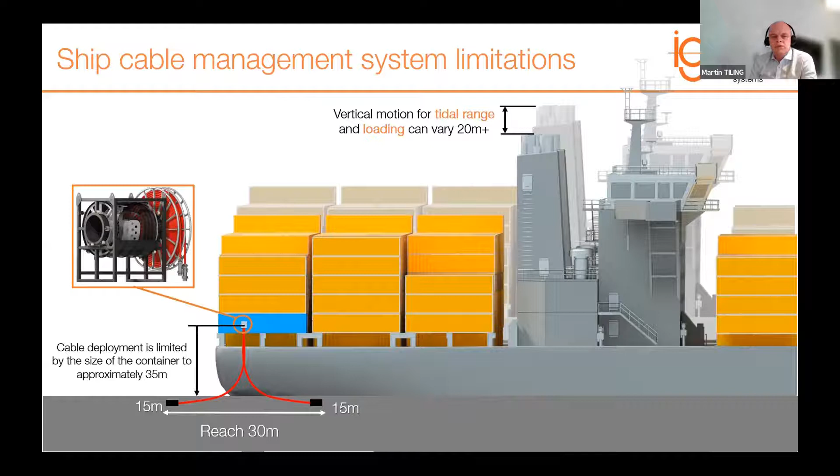What kind of problems are we facing? The main issue is that the cable management system placed on board a container ship has a limited deployment length. In the end, it depends on the site location, on the design of the wharf, and also on the tidal range, because that can be very different, from Hamburg to Kiel, for example, or from Vancouver to Marseille. You can have a big tidal range, and this can sum up to more than 20 meters of vessel movement that needs to be compensated. And then you have limited reach for the plugs to plug them in at any place.

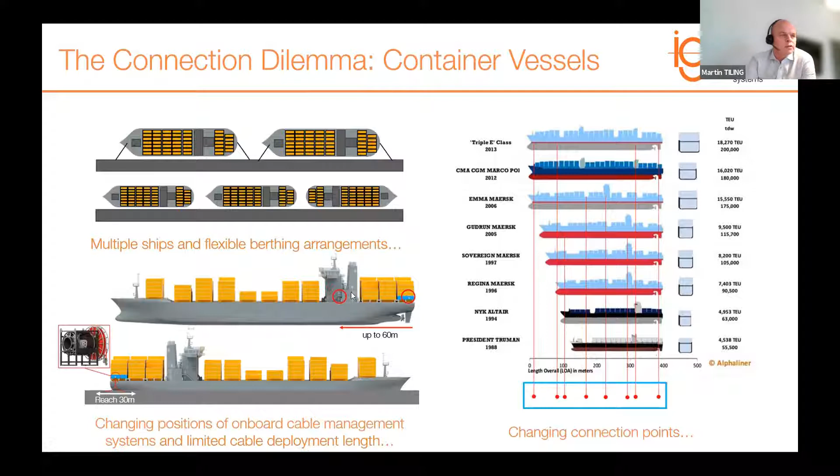That leads to the main problem of all shore power connections, not only for container vessels, but we see this also on cruise vessels. We have different solutions to address that, but the connection dilemma is really a key issue for all ports designing a shore power system. Every day you have different calling vessels in terms of size, berthing starboard, berthing port side, and the location of the cable management system on board can be at various points as well. So in the end, you don't know where to connect the vessel. Not today, not tomorrow, and foreseeing the future with new vessels or new lines calling this berth, it gets even more complicated.

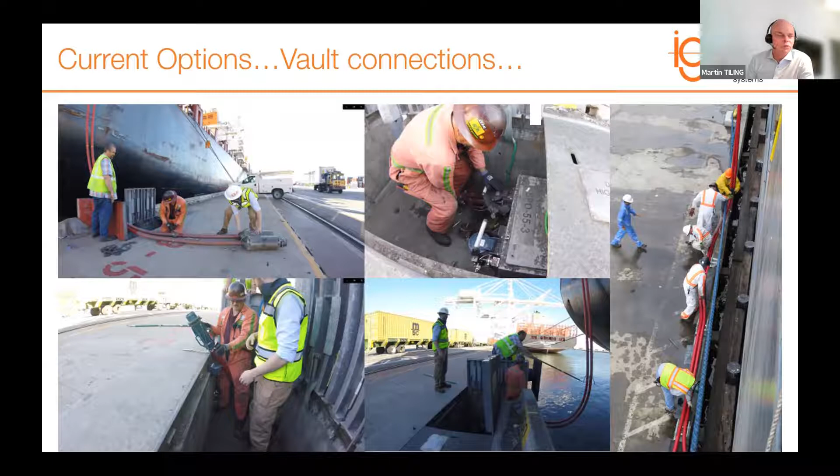If you think about the coverage you can achieve by placing an outlet every 50 meters, it not only costs a lot of money, but in terms of operation you create sort of red zones where you cannot connect. So in the end, you have to move the vessel or you cannot connect.

And even getting close to it, these cables are super heavy. They weigh 10 kilos per meter. These are 2 cables. It's not easy to move them. You can do this coming from the vessel about 3 to 4 meters. That's fine, you get this done. But afterwards, you definitely need help. You need to call your colleagues.

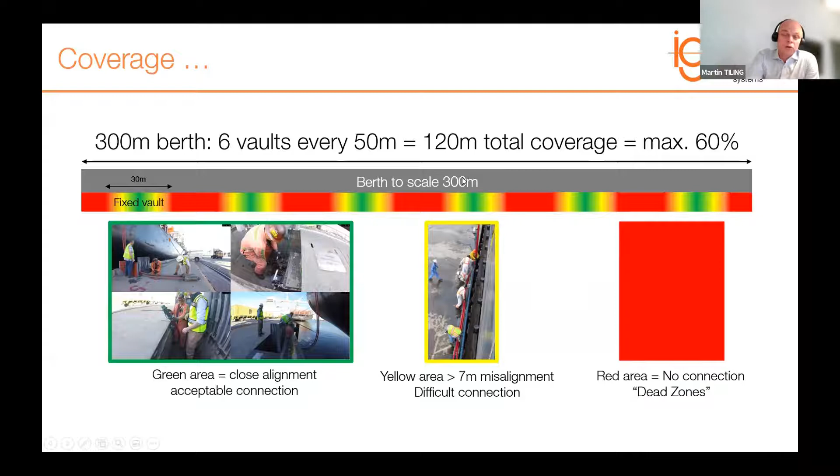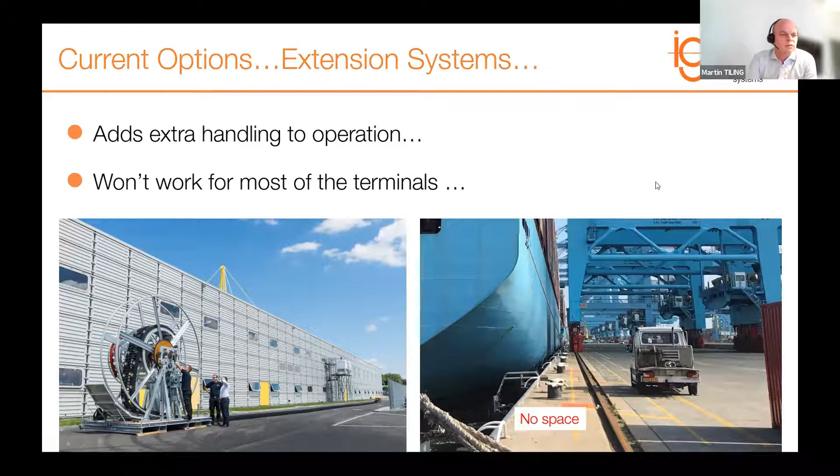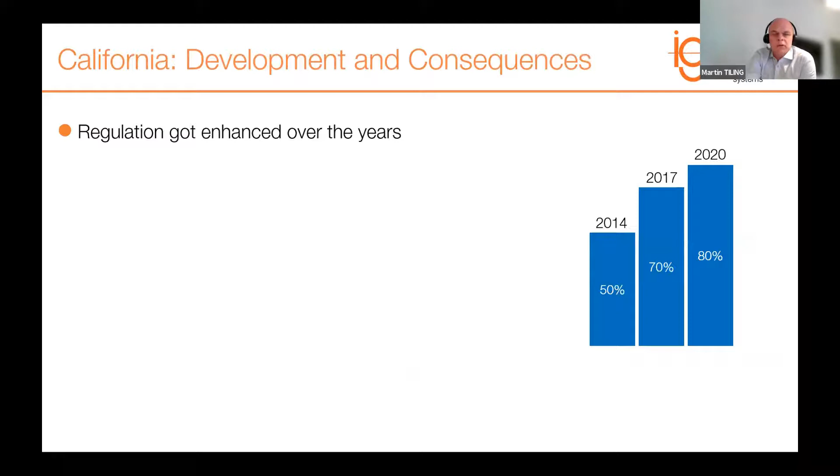What we learned from California: the regulation got stricter and stricter. In 2020, they had to connect 80% of the vessels. So they started putting an outlet at each end of the wharf or berth. Then they realized, okay, another vessel is coming and the location is different. Then they added 2, then 2 more. So in the end, they had 6 outlets. That's the main standard in California.

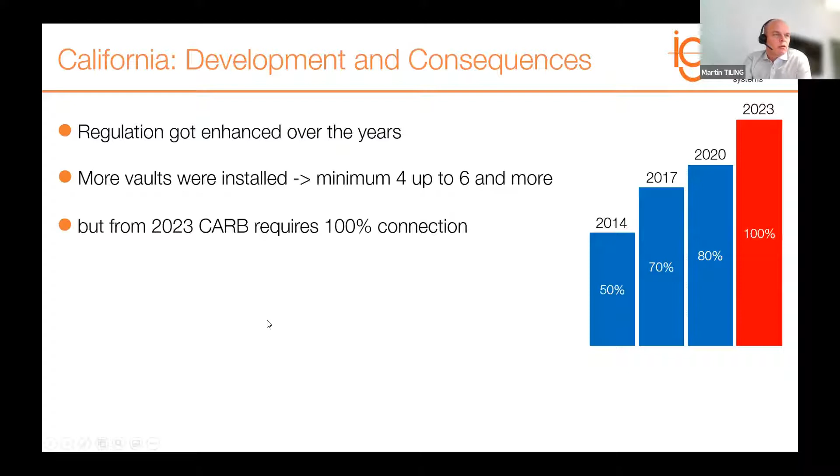6 outlets cost a lot of money, doing all the trenches, all the cabling, installing the outlets in the ground. But now CARB, the California Air Resources Board, requires 100% of connections. LA and Long Beach invested approximately 150 million US dollars, and it seems they have to invest the same amount again to reach this goal of 100% connection. Why is 100% connection important? Because otherwise they face penalties for not being compliant with the regulations.

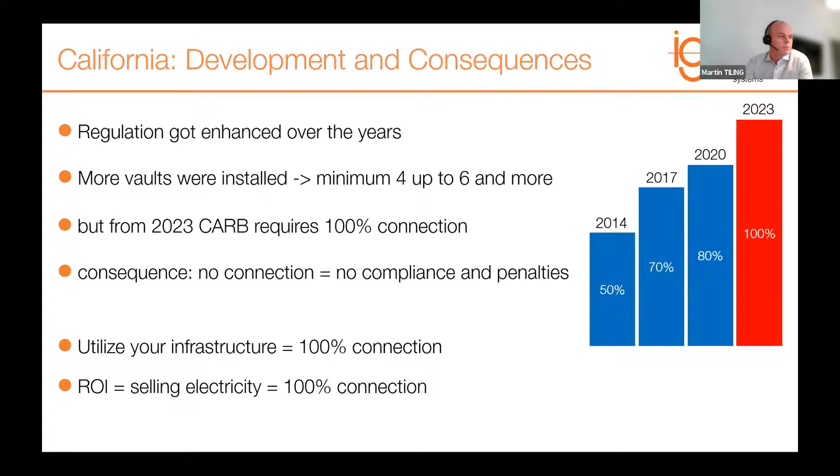But thinking ahead to different ports, the key drivers for shore power can be different, but in the end, you want to utilize your infrastructure. All the equipment you're installing, especially the electrical equipment, frequency converters, transformers, trenching, cabling, you want to get the most out of your money, because in the end it's all about selling electricity, connecting as many vessels as you can, and achieving a 100% connection rate. And 100% connection also means zero emission.

So no one has a crystal ball, and we need to plan for the future. And so you need some kind of flexibility. And when Port of Oakland came to us and said, okay, we need a system that provides us the ultimate connection flexibility, we cannot add more vaults. One vault, including cabling and installation and all, is approximately 1 million US dollars. Maybe it's a little bit cheaper, but it's a lot of money for one vault.

But also, they said that you can't make a Swiss cheese out of my terminal. There are cranes traveling over the deck, and there's a lot of steel in the ground, and it's not easy to dig any trenches and holes into the terminal. And they wanted to have a one-time investment for 20 years of lifetime, so one and done.

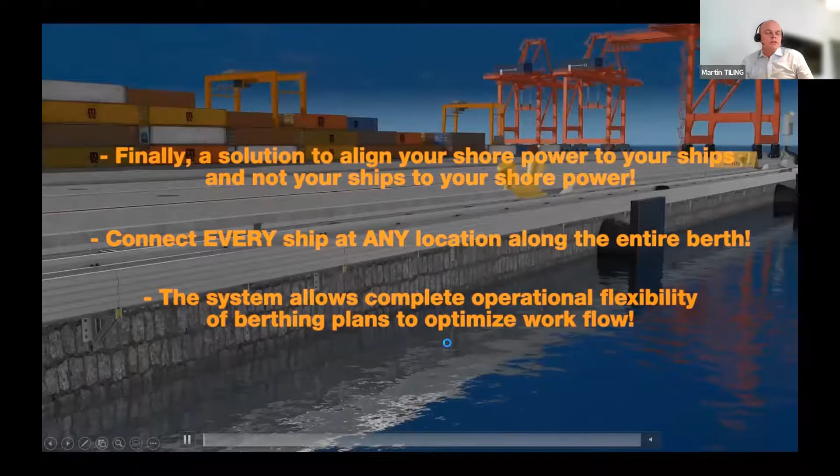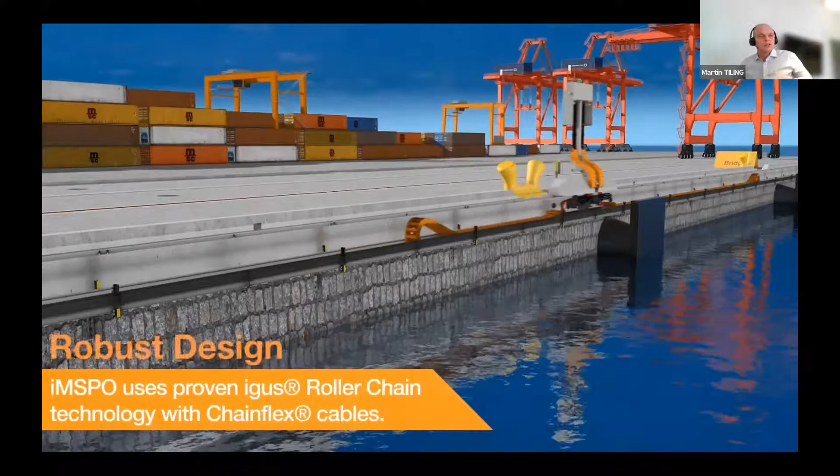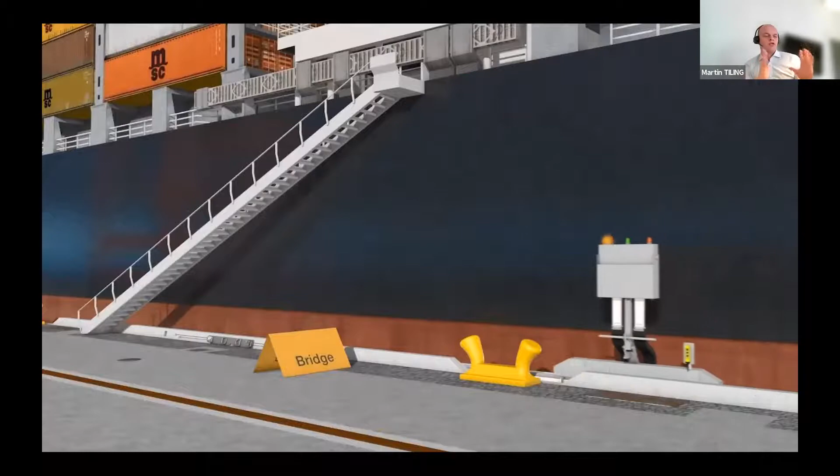So we started to analyze, and as Josh mentioned as well, we went there, did our studies, did the plugging, understood operation, learning how this could be done. And the only place that we found acceptable was to put a track element outside the trench and have a mobile shore power outlet that travels along to bring shore power to the vessel, and not move the vessel to shore power.

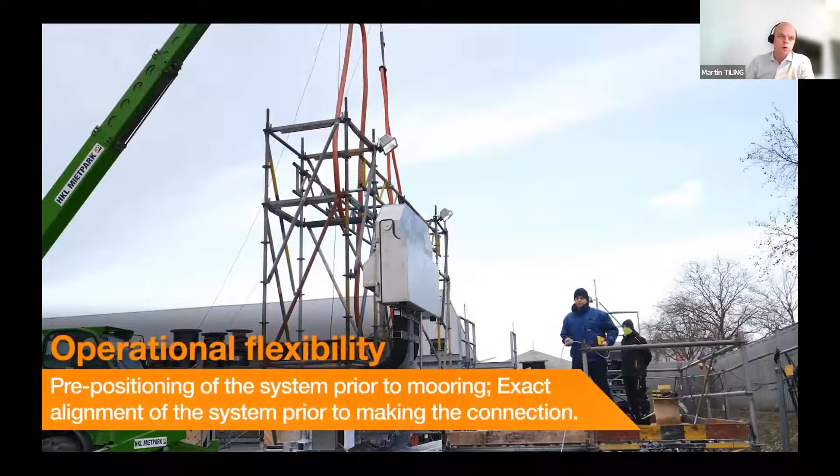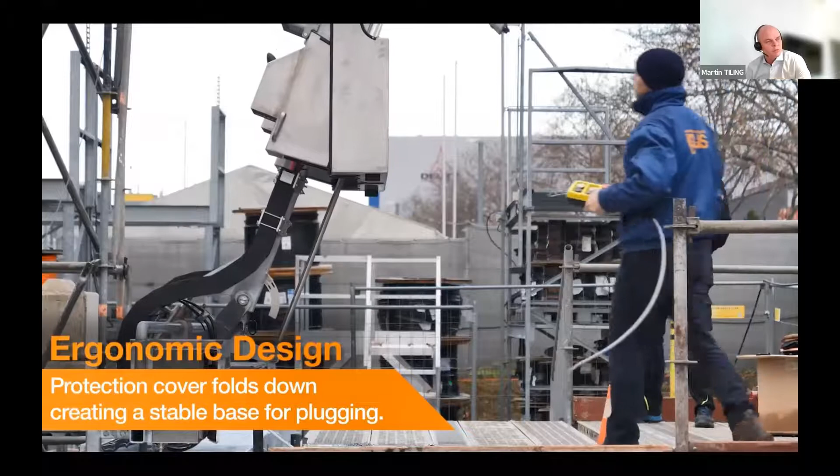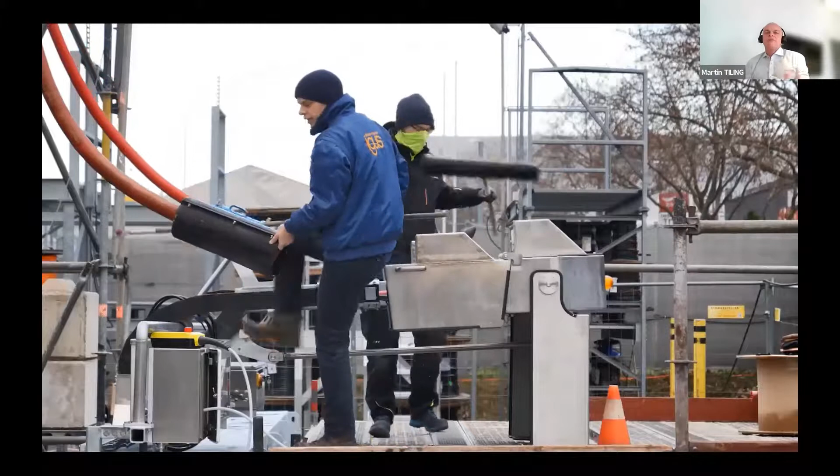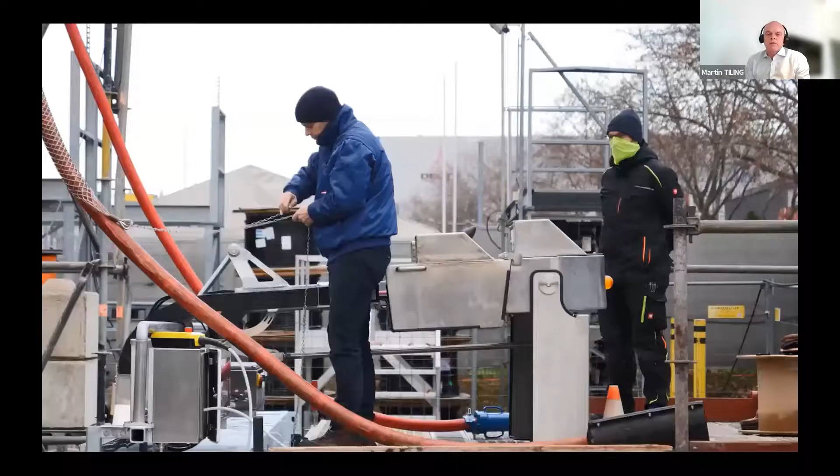The next step, after designing and proving all this concept, was building a system. And in our factory in Germany we created a test stand and installed a fully functional system with 20 meters of travel, because everything is super heavy, everything is big. So it's a real challenge. It sometimes looks nice on paper, but you need to do the real thing to learn what it means to do this connection and to prove that every single step is working, because bringing this out there, then it has to work.

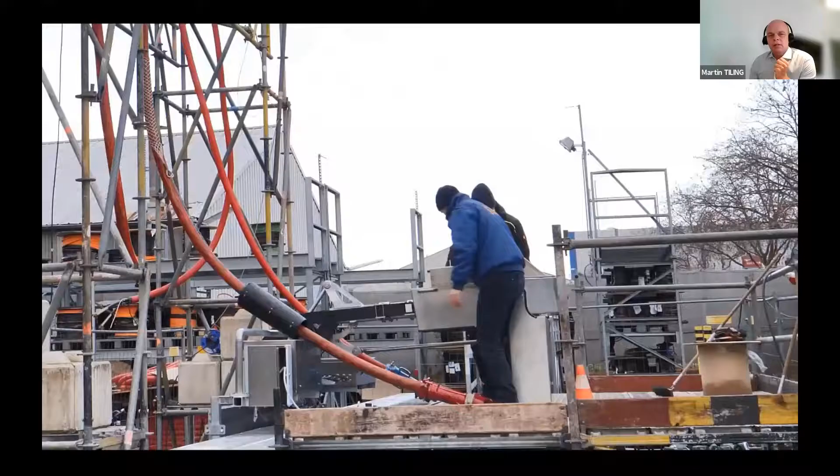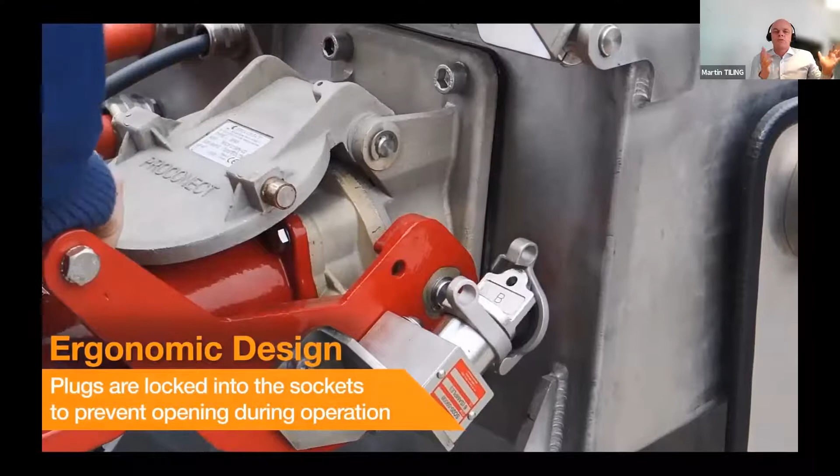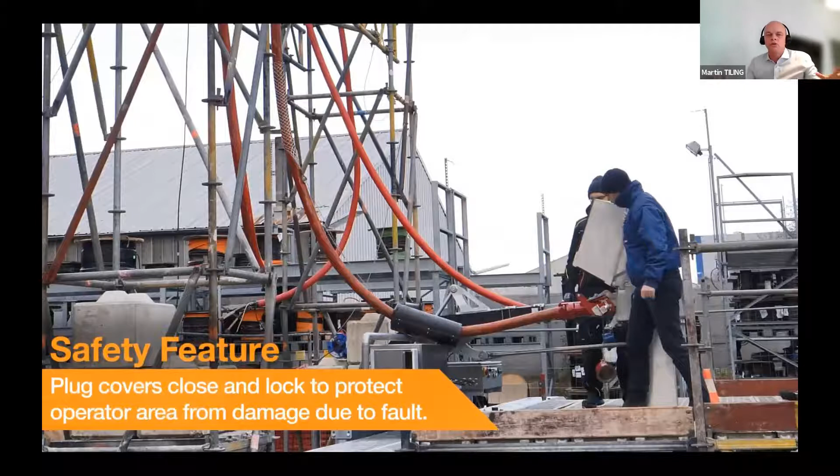And so the good thing is that we have an international standard and that we can follow a lot of guidelines in terms of safety and connection procedures and making the system safe, that we can address here in the systems. And the good thing is it's working. I mean, shore power has been used for many, many years and has its procedure, and it's working safely. So it's not a brand new technology.

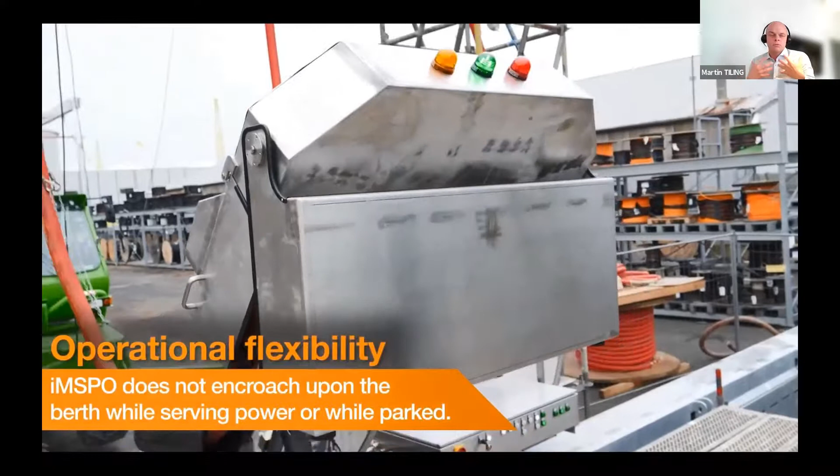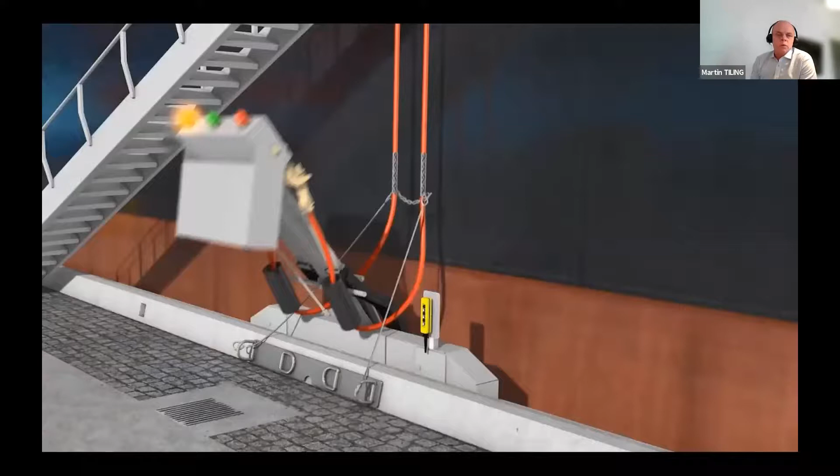But the question is how we can improve this technology, how we can be innovative to supply a smart infrastructure for the needs of the future, to get the most out of your money and achieve 100% of connections. As you can see here, we have also established a Kirk key mechanism to avoid that the system can be powered on without being correctly connected, or that you can disconnect without the power being shut down.

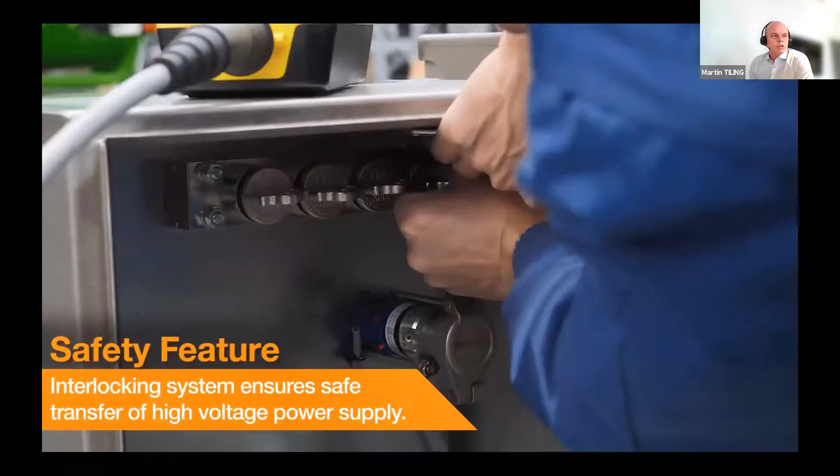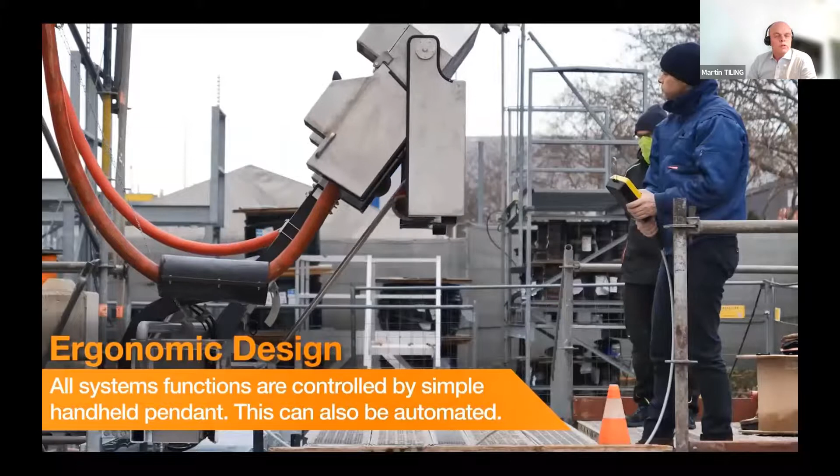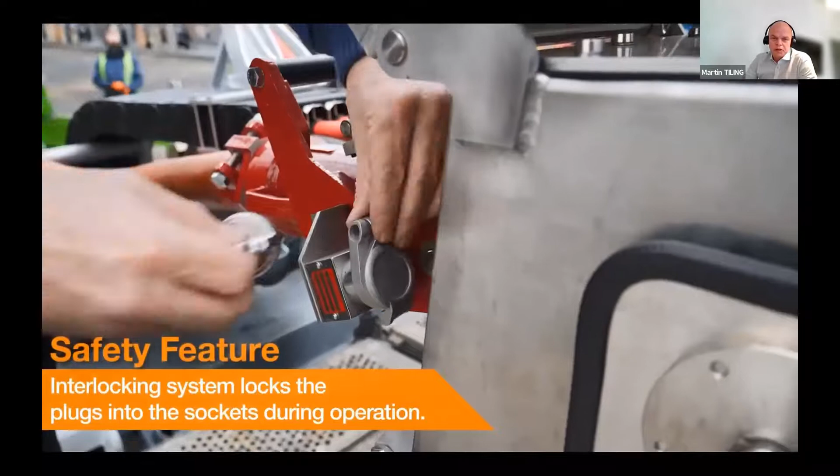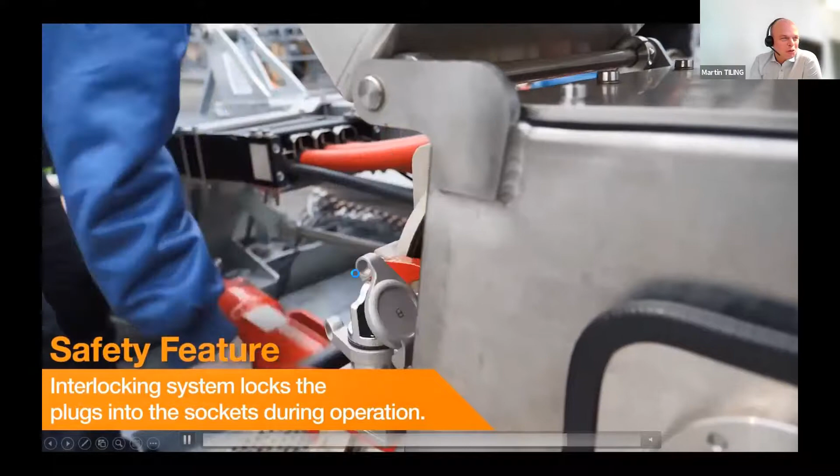So these procedures are all well established, and in all shore power systems you will find such methods. We are very happy to install our first systems in Port of Hamburg. It's very exciting for us. It's a great honor to do so, and yeah, we're looking forward to the future, to see it running on a terminal.

One important issue is installing something outside the terminal. I mean, we make it flexible, but you also need to make it safe. So it's a very big challenge to really find a good solution for each port, because there is no port like another, just like George mentioned before. So analyzing the terminal and getting the experts on board in each field, from cabling, cable management system, but also protecting the system. We collaborate here with the Shibata Fender team, one of the two leading fender manufacturers worldwide.

And there are many different solutions for how you can protect the system. What needs to be assured is that at 100% compression of the fenders, which is what they are designed for, the system is protected and not damaged. And we can achieve that. We have studied a lot of different ports together with Shibata to achieve this goal, to make a reliable one-time investment solution for the future of the ports.